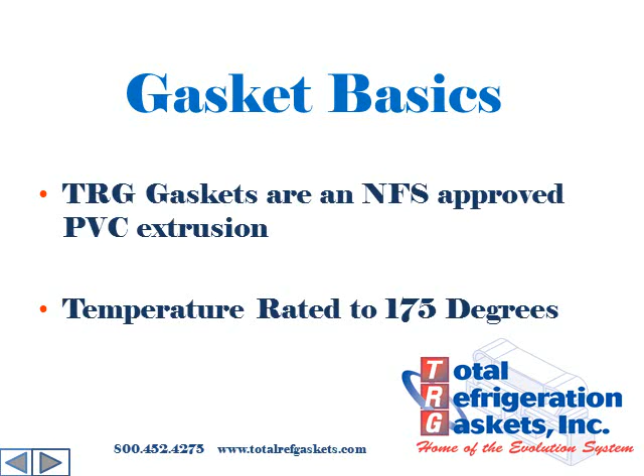When we talk about gaskets, we use some terms that you may not understand. To facilitate better communications, let's take a minute and talk about the parts of a gasket.

The magnet pocket is the square pocket that makes contact with the front face of the refrigeration unit when the door is closed. The magnet creates a better seal and in most cases actually keeps the door closed. If you just have a pull handle, not a latch, you must have a magnetic gasket.

The accordion is the bellows area right below the magnet pocket. In most cases, it attaches to the bottom of the magnet pocket. Some gaskets have an external accordion that attaches to the side of the magnet pocket. The accordion gives the gasket stretch to compensate if the door or the unit warps. When you are adjusting hinges, try not to stretch the accordion unless it's absolutely necessary.

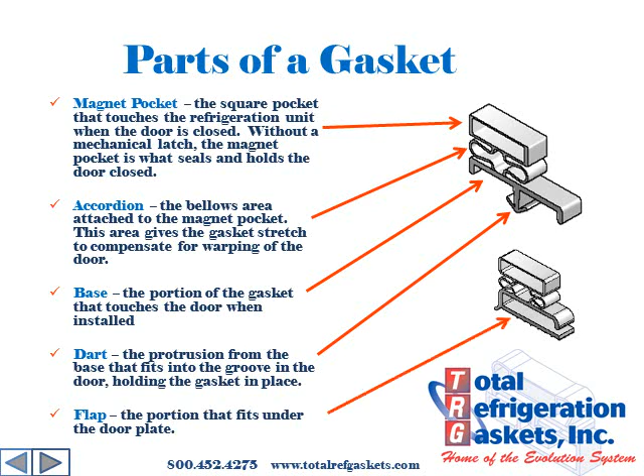The dart is a protrusion from the base of a dart-style gasket. It fits into a groove or track on the door to anchor the gasket in place. It is a simple method to install a gasket and requires no tools. The flap is the piece that fits under the door plate when installing a screw-on style gasket.

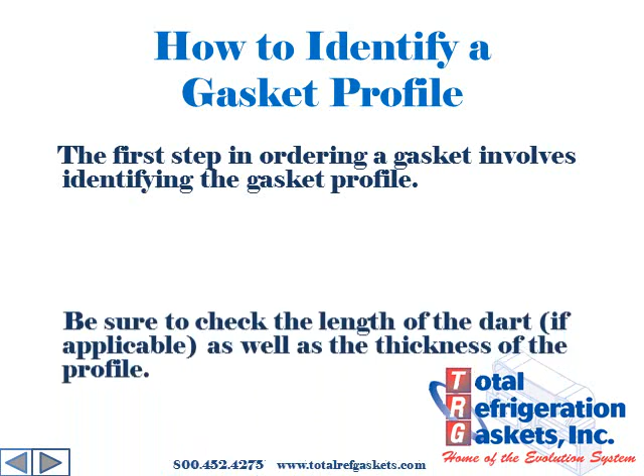The first step in ordering a gasket is picking the right profile. Is there a dart? How long is it? How thick is the gasket? Where is the magnet pocket in relationship to the base? Let's see how to figure that out.

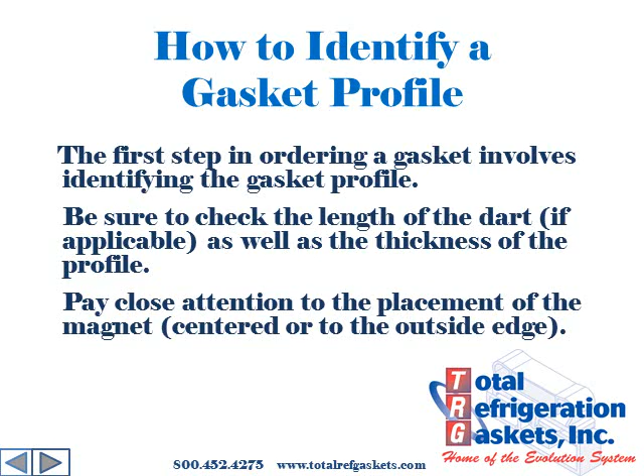Begin with how it mounts. This is the most important part. There are 4 categories for gaskets: screw-on, push-in, dart, and panel gripper.

A screw-on gasket mounts around the door plate or with mounting strips. It may be screwed on or pop riveted. A screw-on gasket will always have a flap. The gasket is multifunctional. It seals the door as well as creating a thermal break for the door. The flap prevents the inner metal of the door from conducting the cold to the outside of the door, which could create a moisture problem.

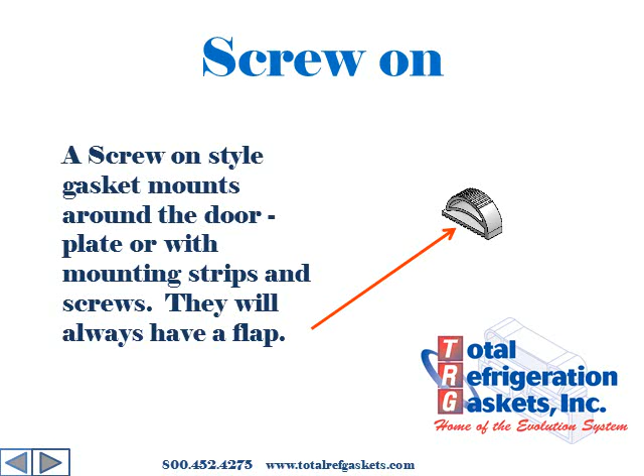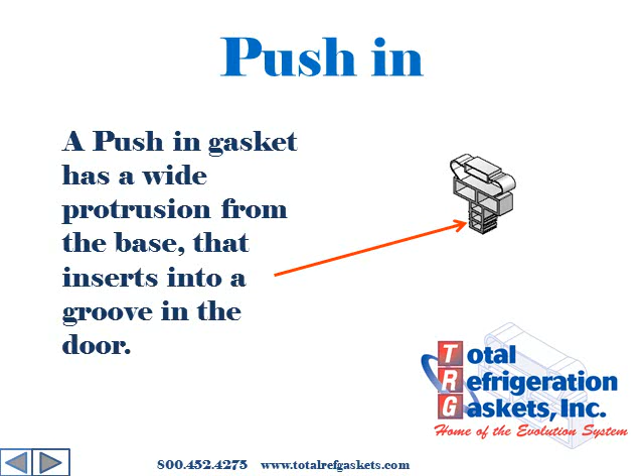A push-in gasket has a wide protrusion from the base. This fits into a groove that is molded into the door or between the inside door plate and the outside metal of the door. It is very important to measure push-in gaskets accurately.

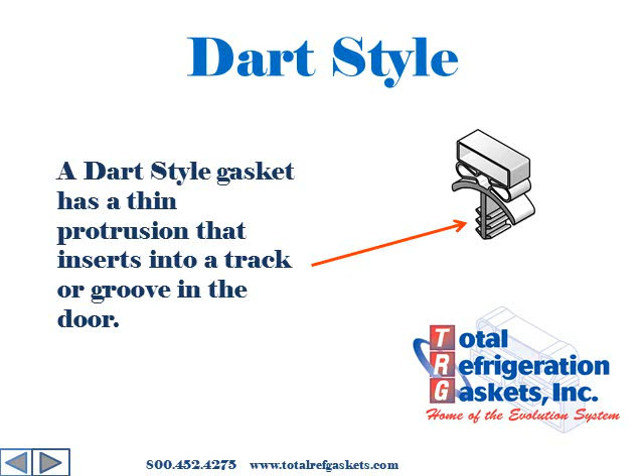A dart gasket has a thin, arrow-like protrusion that inserts into a track or groove in the door. This dart may be only 1/4 of an inch long or up to as much as a 1/2 inch with multiple barbs. Multiple barbs are sometimes referred to as triple darts.

Panel gripper gaskets mount around a panel on the door. The hook on the flap of the gasket catches a beading around the panel. This style gasket is rare.

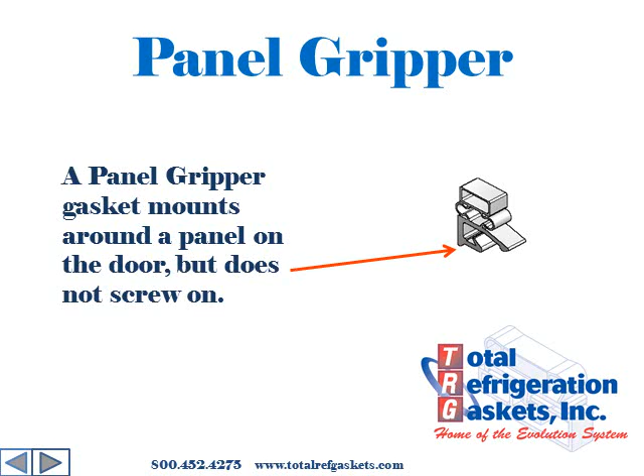Now that we have established how your gasket mounts, we need to decide if it's a magnetic gasket or a compression gasket. The square magnet pocket is one way to recognize a magnetic gasket. If the door has a pull handle instead of a latch, you must have a magnetic gasket. This does not necessarily apply to drawers. If you are still not sure, see if a paper clip will stick to the front face of the gasket.

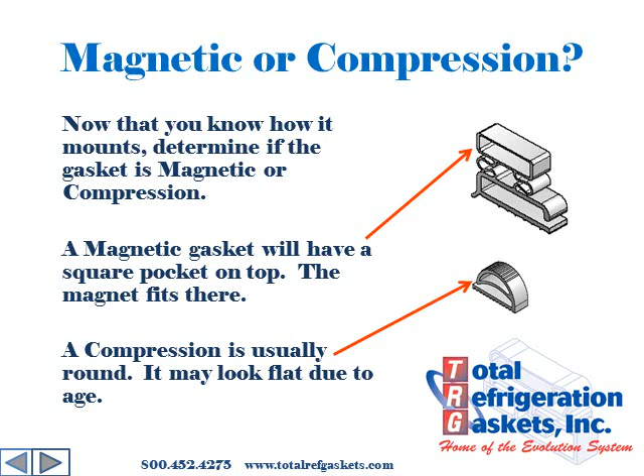Although a compression gasket was originally round on top, this roundness compresses flat when the door is closed. As the gasket ages, it retains that flat shape.

The thickness of the gasket is very important. It should be thick enough to fill the gap between the door and the unit. If possible, this should be checked on the hinge side with the door closed. A magnetic gasket with an accordion can be slightly thinner than the gap. It will stretch. A compression gasket should be thicker than the gap in order to compress. Thickness is critical. Too thick and the door will not close. Not thick enough and the cold air escapes.

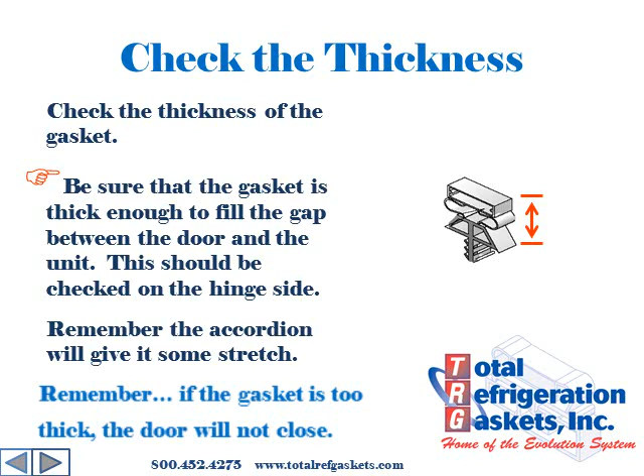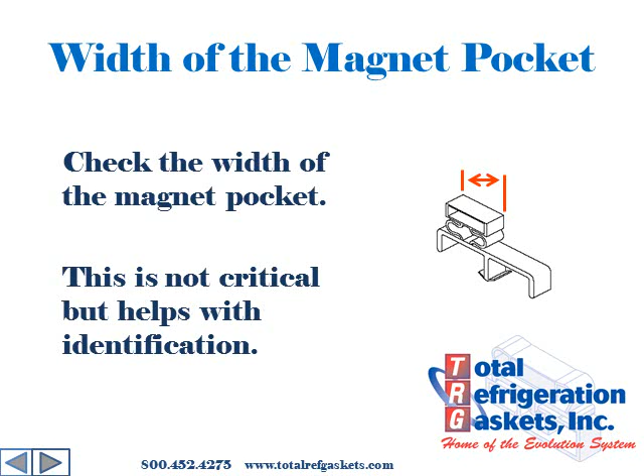The next feature to check is the width of the magnet pocket. This will help in identification, but is not critical. Usually the bigger the magnet, the better the seal. We do use higher energy magnets in some of the smaller sizes to compensate for the smaller contact area.

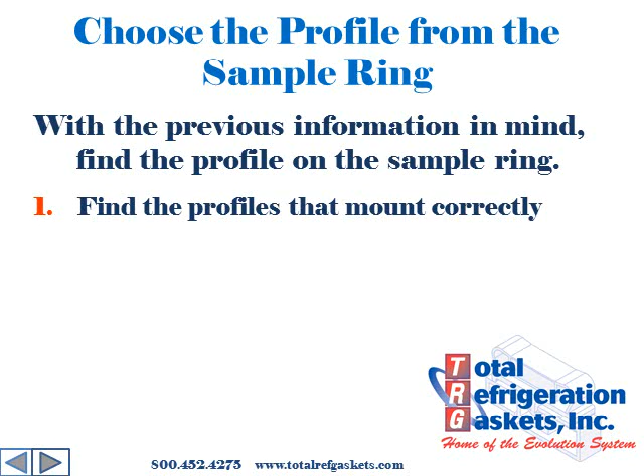Now it's time to pick your profile. How does it mount? Screw on? Dart? How long is the dart? Find the gaskets on your sample ring that mount like yours. Narrow it down further by picking between magnetic and compression.

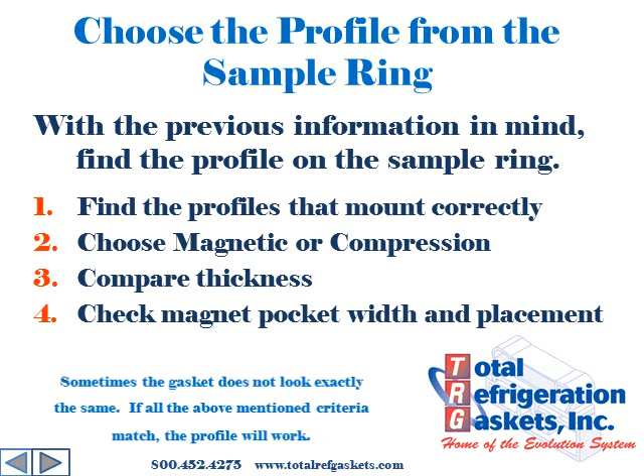Have you seen your gasket yet? Odds are you have. Check the thickness of the gasket as well as the width of the magnet pocket. Check where the magnet pocket is in relation to the base of the gasket. Sometimes you may not see the exact gasket that you have, but if you find one that matches all of these criteria, it will work in your application.

Still not sure? Don't worry. We will go over each profile later in the presentation.

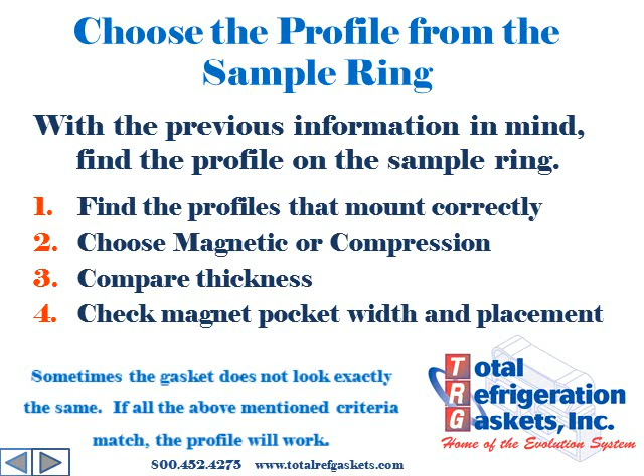The next step in ordering your gasket is measuring. Since gaskets mount in different ways, they can be measured in different ways. All gaskets can be measured OD, or outside dimensions.

Screw-on and panel grippers can only be measured that way. Dart-style gaskets can be measured OD or dart to dart. Let's start with OD.

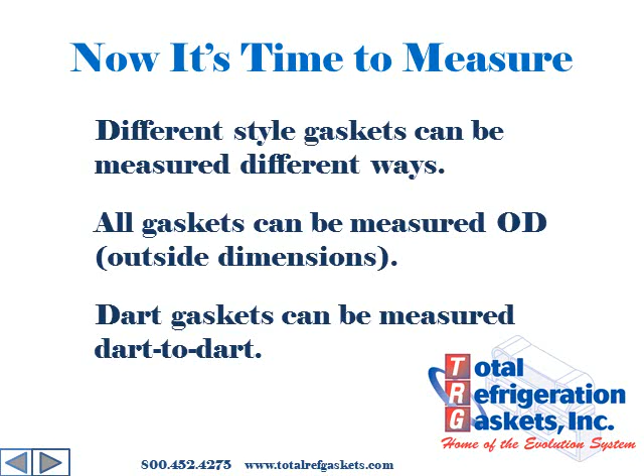Outside dimensions are measured to the widest part of the gasket. This is almost always the base of the gasket. Don't make the mistake of measuring just to the magnet pocket.

When we measure, cut, and weld the gaskets, we are looking at the dart or flap side. We cannot see the magnet pocket when the material is in the machine fixture.

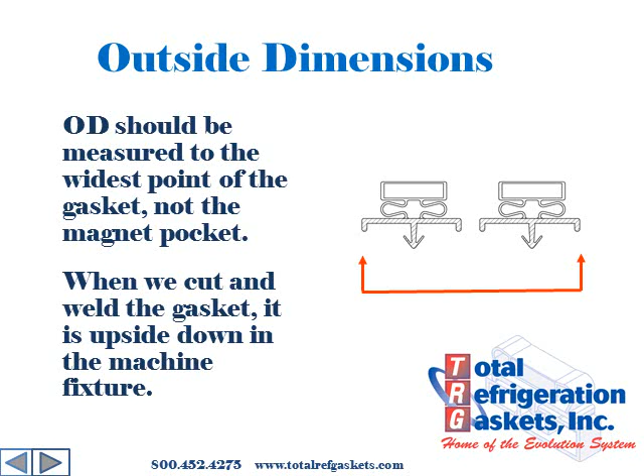Dart-to-dart measurements are sometimes necessary. If it is difficult to tell where the outside edge of the gasket is due to wear, or the existing gasket does not fit properly or is missing, dart-to-dart is required. Measure from the center of the groove on one side to the center of the groove on the other side.

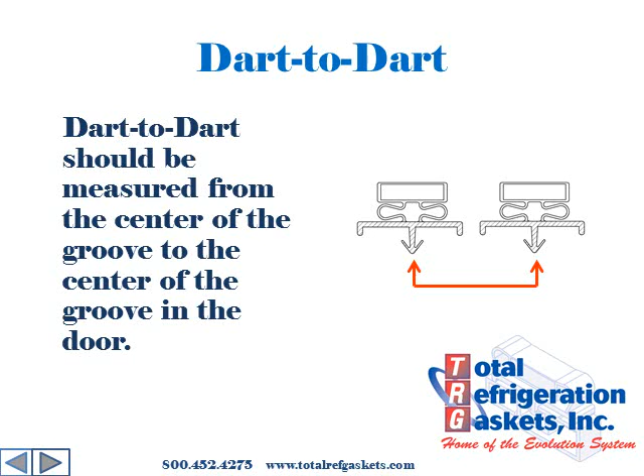Avoid trying to measure the gasket itself when not installed on the door. It is very difficult to get an accurate measurement. Measuring the door is much better.

You do not have to remove the complete gasket to measure dart to dart. Pull the top corners away from the door just enough to see the groove. Make a mark straight up from the center of the groove on both sides.

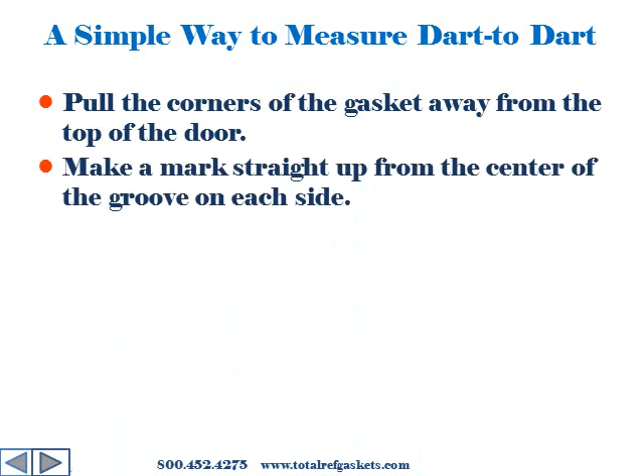Measuring between those marks will give you the width of your gasket. Do the same thing on the side and you have your height. Be sure to reattach the corners.

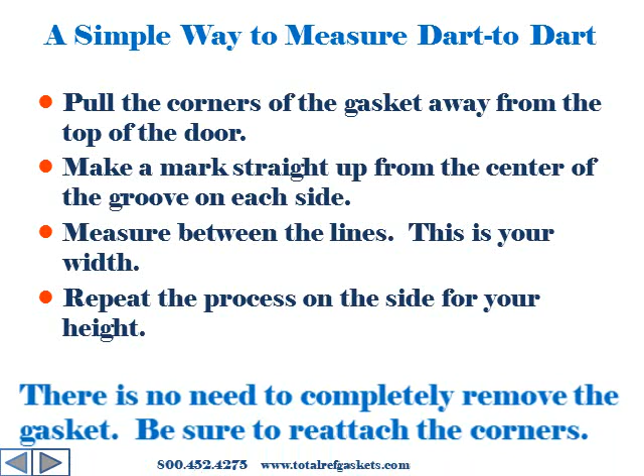Screw-on gaskets are always measured OD. If there is no gasket, or if it does not fit properly, you can measure the plate to which the gasket mounts. A screw-on gasket has a small amount of stretch, so this will give a nice snug fit.

Remember, gaskets stretch, but magnets do not. Don't go overboard and measure too tight. Your magnet will not reach into the corners properly.

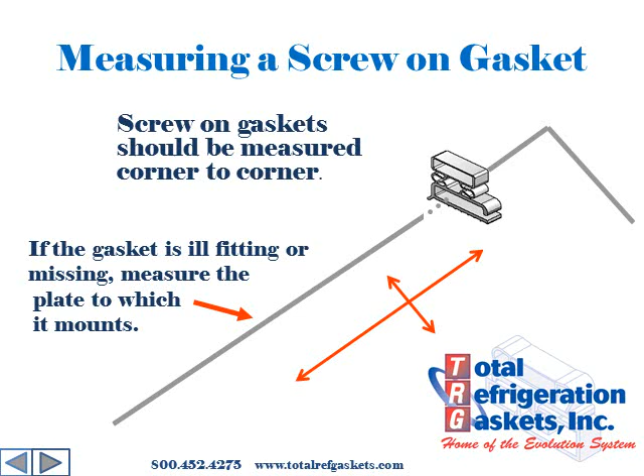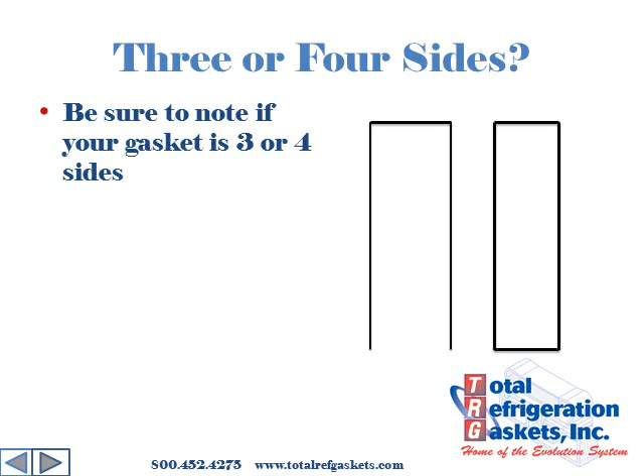Although most gaskets have 4 sides, there are some that will not run along the bottom of the door. This is most often seen on walk-in units. Unless there is a raised floor, there is no contact point for the gasket to seal against.

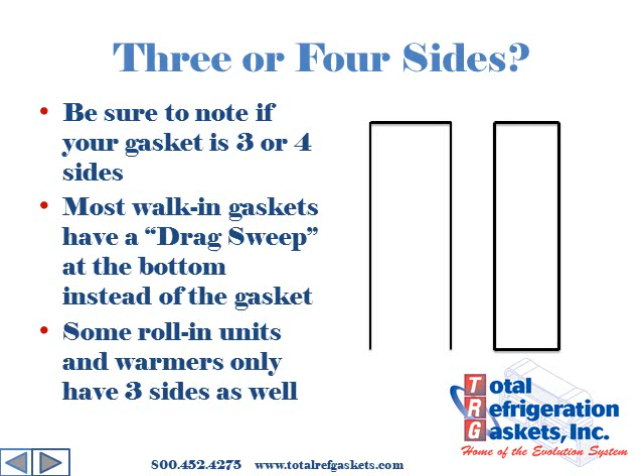In this instance, you will find a drag sweep. You will also find 3-sided gaskets on roll-in units and some warmers. Be sure to reference the number of sides when ordering.

Although we can make 90% of the gaskets in the domestic market today, there may still be profiles that you do not find on your sample ring. You may want to do some creative gasketing.

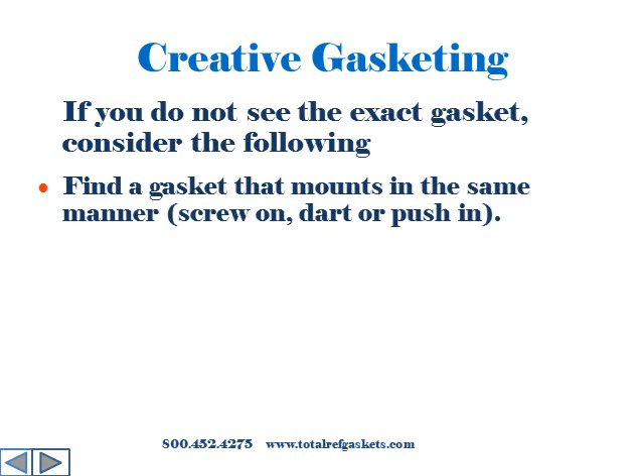If you can find a gasket on the sample ring that mounts in the same manner as the existing gasket, you are halfway there. If it is a dart or push-in gasket, be sure that the sample fits properly in the groove.

Next, on the hinge side of the door, check the thickness of the gasket. Be sure that it will fill the gap between the door and the unit. Dart gaskets should always be measured dart to dart when retrofitting.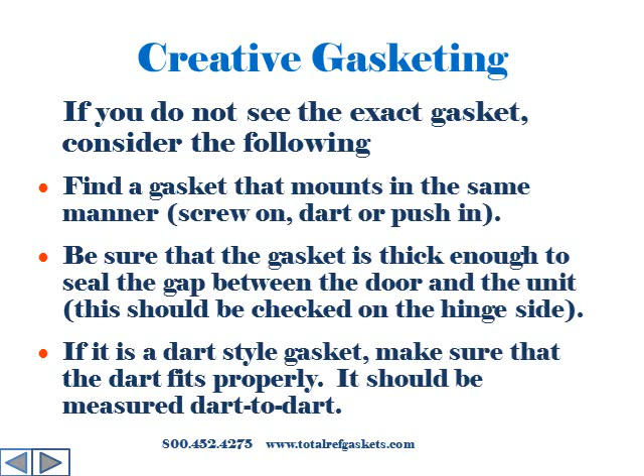Sometimes you may encounter problems with gaskets. Let's talk about some of the most common. Often the hinge side of the gasket will not lay flat against the unit. It will roll to the inside.

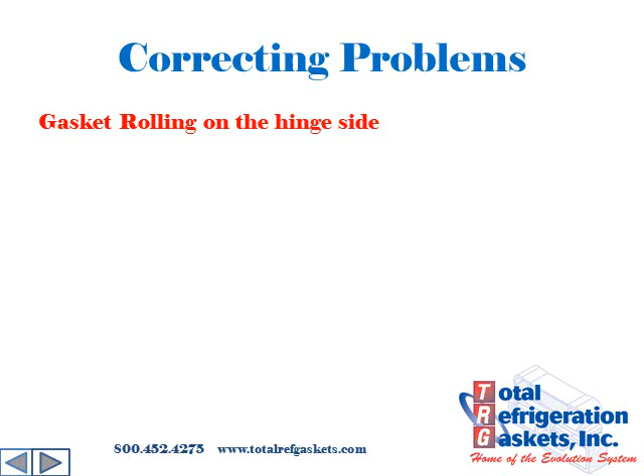We can make that gasket with filler tube instead of magnet on that side. This will allow it to compress and alleviate the problem.

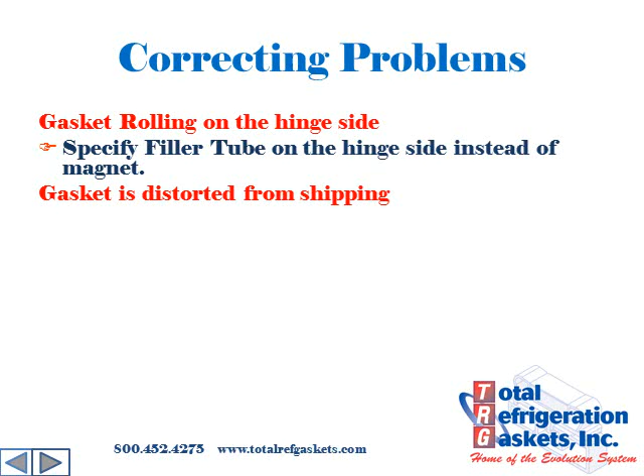It is cost prohibitive to ship all gaskets flat. We recommend removing them from the box as soon as possible and storing them flat. Heat will remove the kinks from shipping.

Warm water, sunshine, a heat lamp, a heat gun, or a hairdryer will all work. If using a heat gun, keep it moving. It can melt the gasket.

Sometimes the magnet will move inside the pocket when a gasket is twisted for shipping. This can result in a ripple when it is straightened. Check your corners to see where the magnet seems short.

When installing, always work from the corner with the magnet toward the corner where the magnet is short. This will push the magnet back into place.

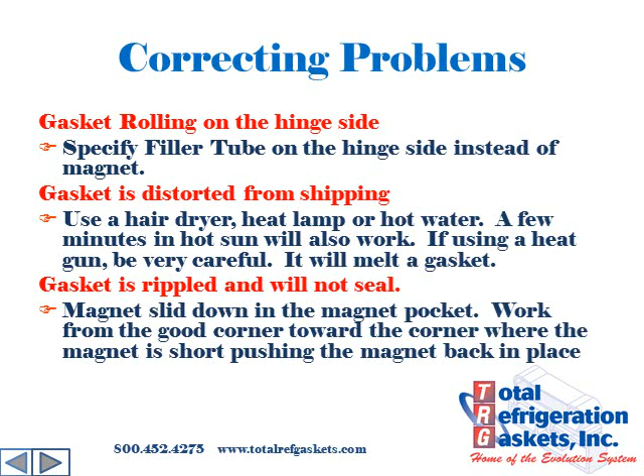This presentation gives you a good foundation for gaskets.